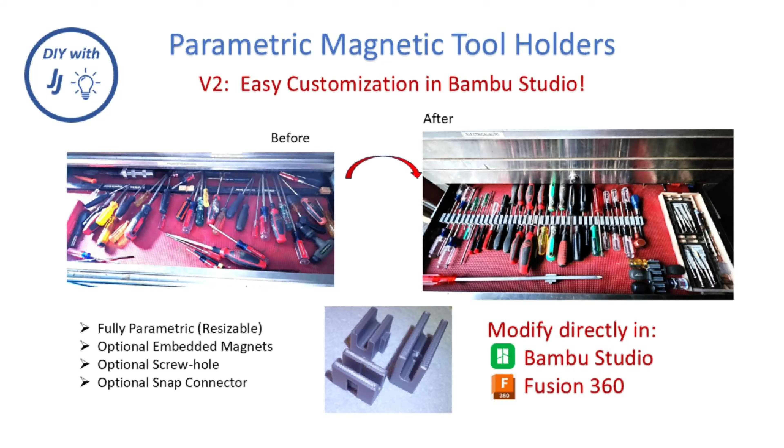One of the first 3D designs I posted online a couple of years ago is also the most popular design I've posted so far. It's my tool holders with embedded magnets. It was also one of the first YouTube videos I posted. There were three different sizes in that post, and I've had a few requests for more sizes, and indeed I've found such a need myself.

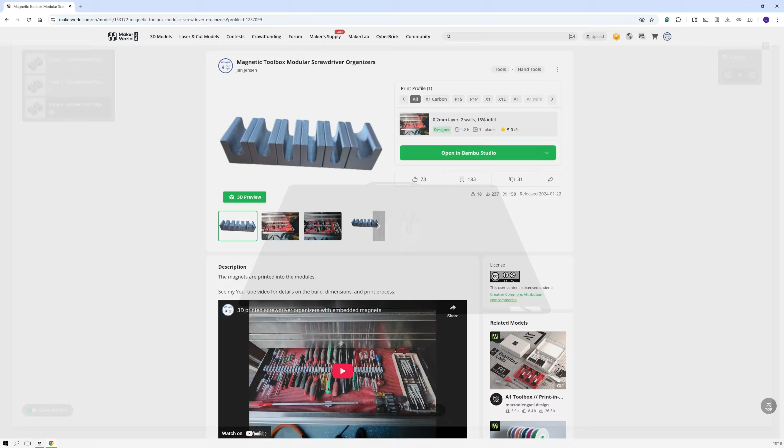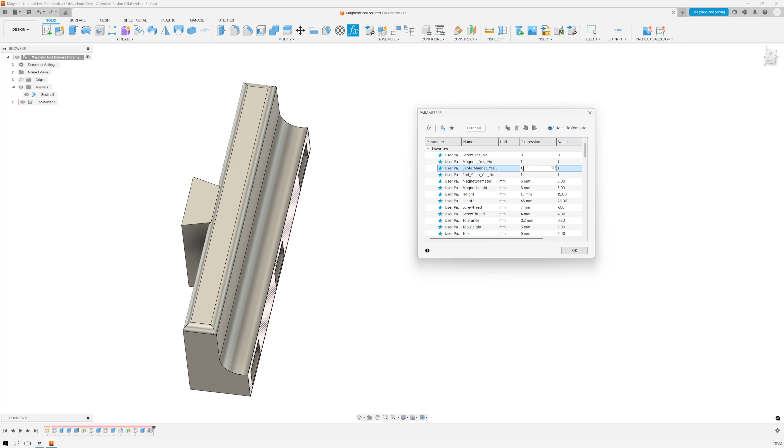Rather than posting more variants and sizes, I set out to generate a parametric design that enables you and I to generate almost any size and configuration desired. I wanted optional embedded magnets and optional screw holes. Here you can see how fast and easy it is to reconfigure the tool in Fusion. You can also make these changes directly in Bambu Studio. Keep watching the video and I'll show you the details.

These organizers have really worked out well for me, but in the 2 years I've used them, I learned that there were some changes that could make them even better. That's what this video is about. In it, I'll show you the following.

First, I will show you a couple of not so obvious reasons to be able to make many different sizes and to modify the design itself. Next, I will show you why I chose Fusion for this type of design. Then I will go over every user parameter in Fusion and how you could handle them very efficiently. As I mentioned, you can change the parameters directly in Bambu Studio, and in the next segment, I will show you how to do that.

Following that, I will show you how to print the magnets directly into the tool. No glue is necessary. In the final segment, I will show you how to handle logical parameters in Fusion, just in case you want to make similar flexible designs yourself.

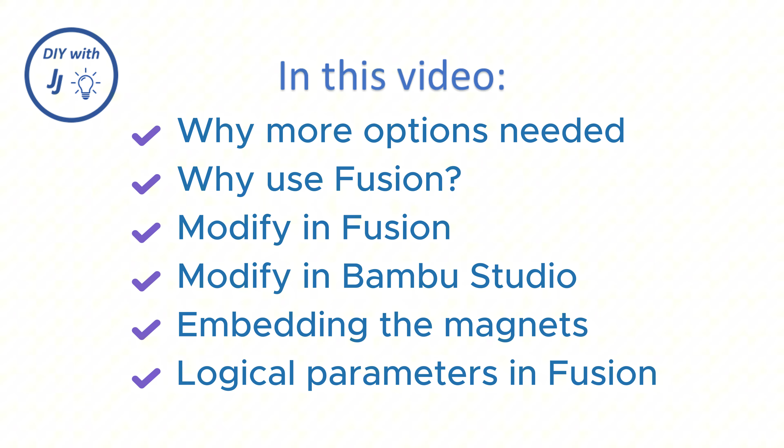So, other than the obvious reasons for different sizes of the tool holders, what was it that I learned from using the organizers in my toolbox that necessitated some other options?

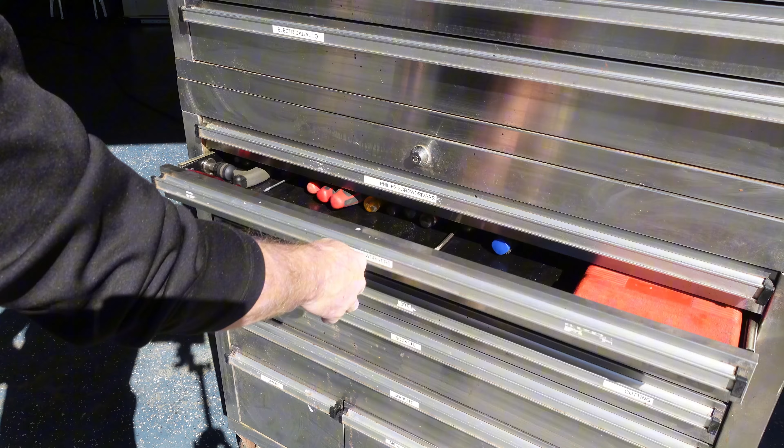The rare earth magnets I used in the toolbox holders are very strong, but unless your drawer bottom is made of a magnetically responsive material, they won't work. Obviously, wood or plastic would not work, but even some steels like stainless steels or very thin steel bottoms also tend to have very low or no holding power for the magnets.

My toolbox is made of stainless steel, but the bottoms are carbon steel. The problem is they're very thin. Therefore, when slamming the drawer, the organizer row gets misaligned. Additionally, for items like stubby screwdrivers with a lot of mass and little steel, they tend to slip out of the tool holder, so a tighter fit is necessary.

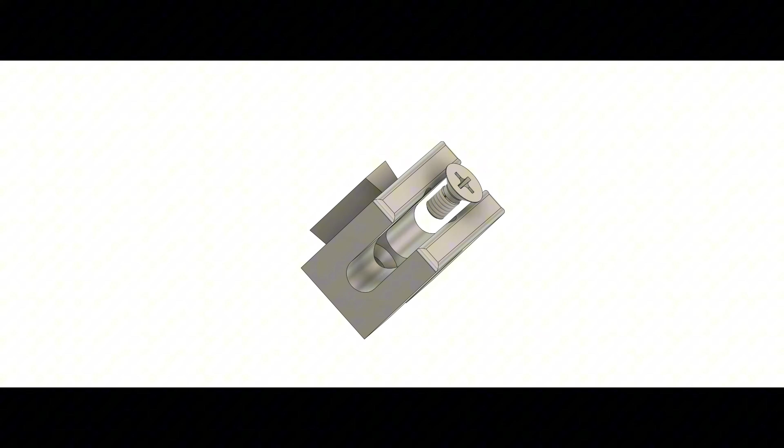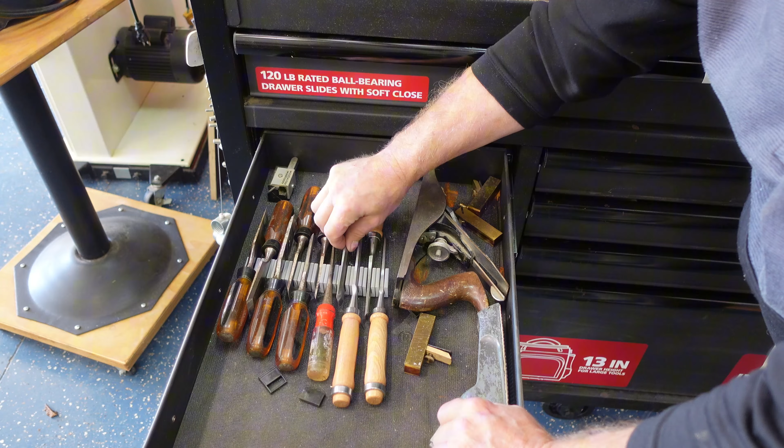The simple solution to this movement is 3 or 4 screws in the tool holder row. And if you print each item snug enough and specific to each tool, you might even skip the magnets altogether. I use the tool organizers for other items such as chisels, where I would like a taller tool holder. Therefore, my new design allows size changes in all directions.

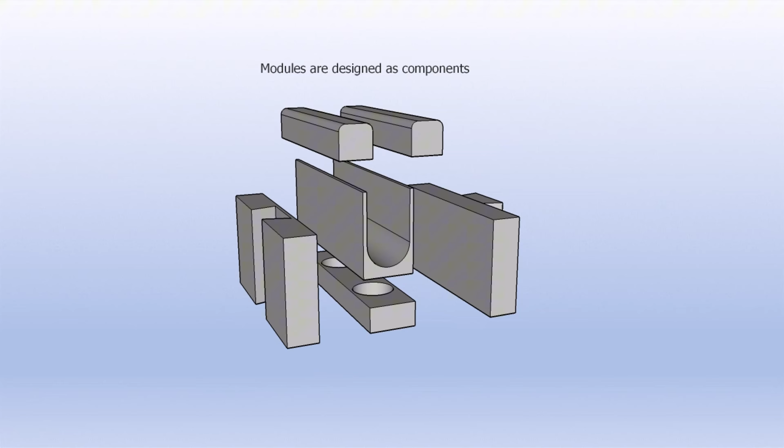That brings me to the reason why I switched to Fusion for my designs. My original tool holder design was made in SketchUp. Not knowing better at the time, I was quite pleased that I could split the tool holders into smaller segments so I could make size changes without having to redraw everything.

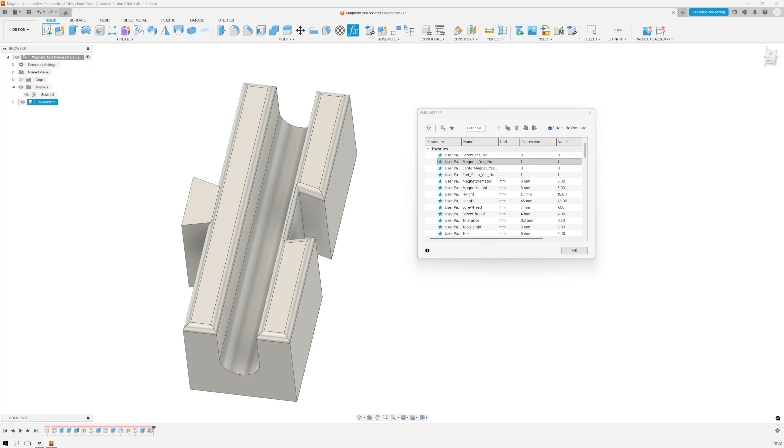But this is no match for parametric design. The ability to set measurements and options and be able to change those things with a click and a simple input is far superior to editing the basic drawing. Let's go over all those size and options parameters in Fusion and how to handle all those adjustments quickly, and explain each and every parameter that you can change.

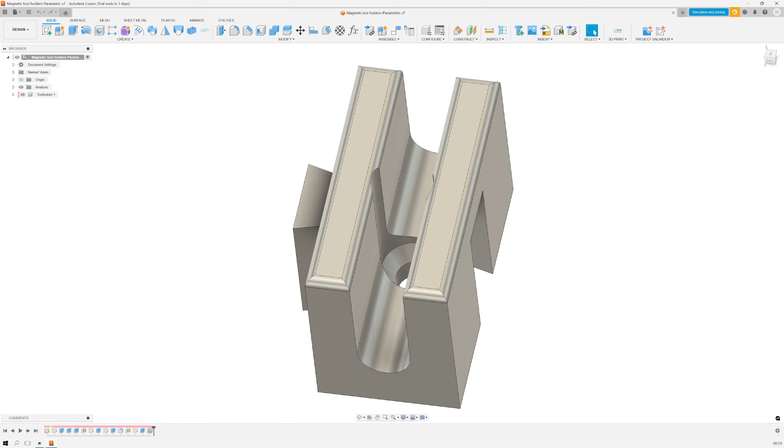Open the tool holder file and then close the Fusion browser. Now use your mouse scroll wheel to reduce the size of the tool holder, and press and hold the scroll wheel and move the image to the side to give us room.

Now open the parameter window and resize the columns and the size of the window. We need to be able to see all the starred favorite parameters and all the columns, especially the expression and the comment column.

Once you have sized the window and the columns, click on the comment header to sort by this column. Unfortunately, Fusion does not allow you to set an automatic sort, so you will need to do this manually every time you open this. I tried to make the comment simple and easy to understand, and once sorted, you'll see all the option switches on top and all the sizing parameters below that.

As you can see here, Fusion does keep your sizing in the session, but again, the sort order is not preserved.

The first option switch in the list is the screw hole. If it's set to 1, you'll get the hole, and if it's set to 0, it disappears. Obviously, we do not want the screw hole if we're planning a center magnet. So if that switch is set to 1, the screw hole will also disappear.

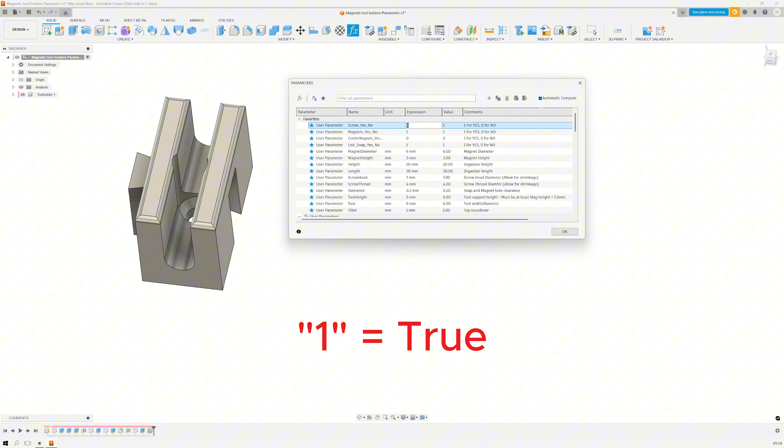This is controlled by Boolean logic, which is widely used in computer programming, and it can be very sophisticated. It isn't in Fusion. In Boolean logic, 1 equals true, whereas 0 equals false. In Fusion, it's merely 0 false, and any other value is true. So you can set any other value than 0 and it will hold true.

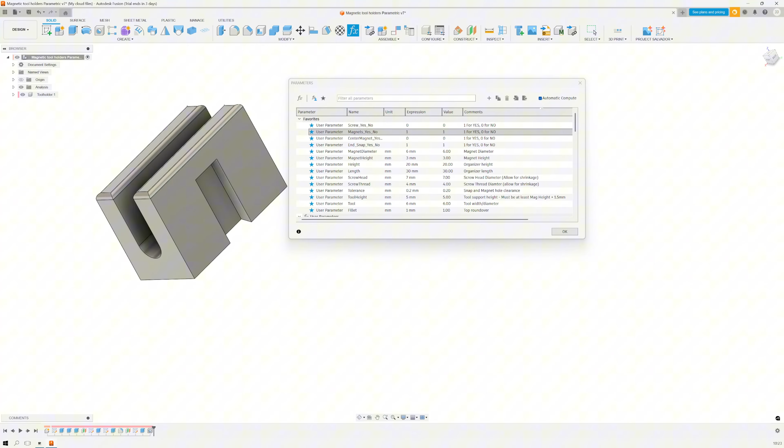For the next 2 switches, I will turn off the screw hole and I will use the section view to show you the effects, which can be observed absent any further comments from me. The last switch is to remove the male snap piece in case the tool holder is placed at the end of the row.

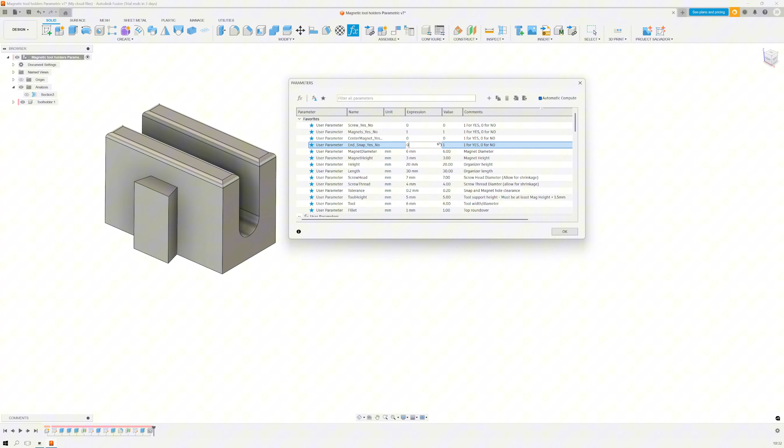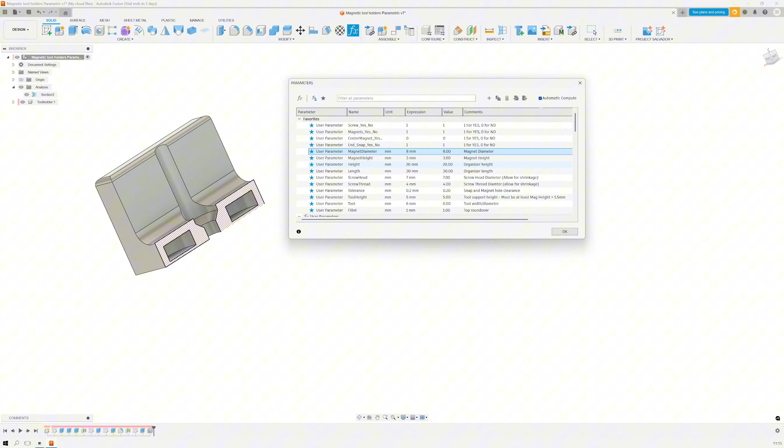The rest of the parameters are for sizing. First, the magnets. Input the exact measurements of your magnets. The tolerance parameter provides enough clearance to insert the magnets. The tolerance numbers pertain only to the magnets and to the snap connectors. For all other dimensions, if you experience plastic shrinkage, you will have to adjust your inputs.

Now just take a look at the changes in the design as I make parameter inputs. The comment column should also provide enough information for you as you prepare your tool holders.

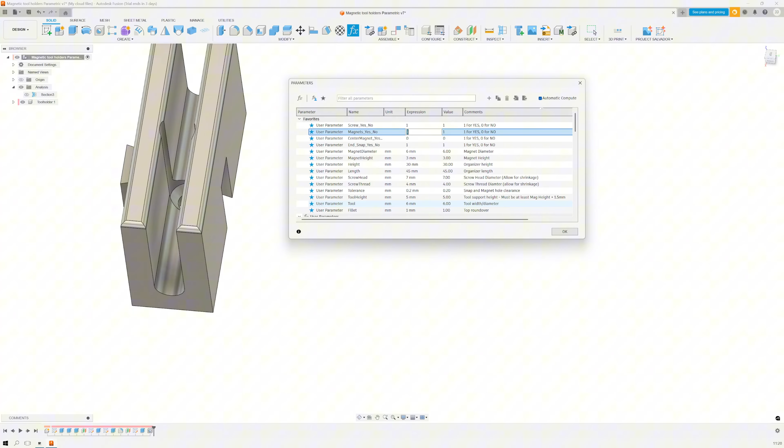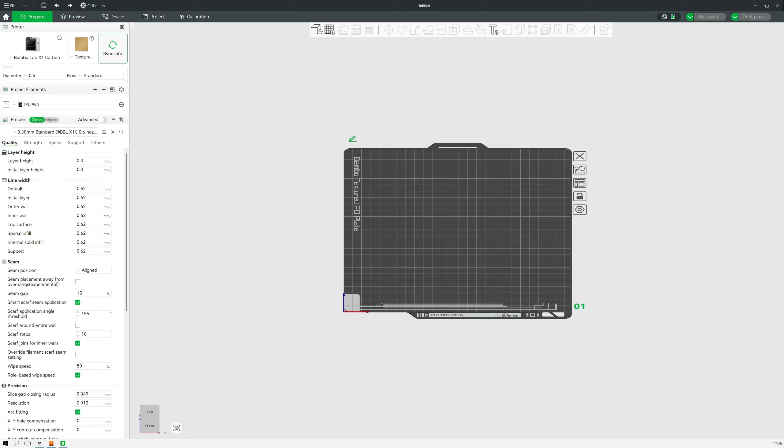Now let's look at how you apply these parameters with Bambu Studio. To be clear, and before you make a bunch of comments, I use the term Bambu Studio loosely. It's actually in Bambu's MakerWorld webpage you make the parameter modifications. You can access MakerWorld from inside Bambu Studio by going to the home page and clicking on the MakerWorld icon. From here you can search and open the designs as you would on the web page.

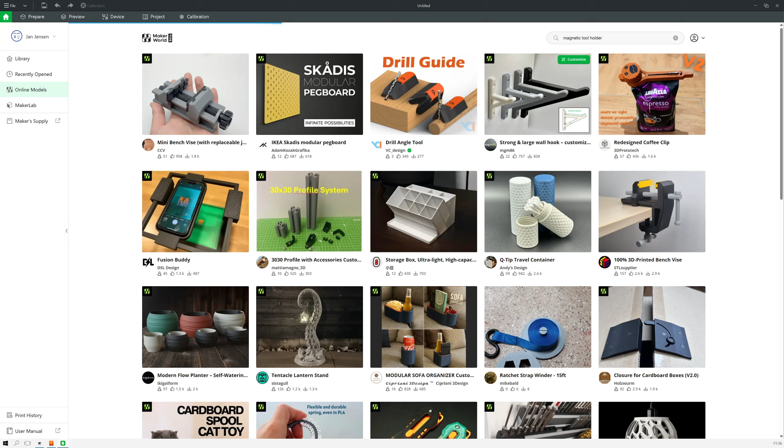I will use the web page here. What you do is click on the green Customize button. That will bring up this page where you see all the stored favorite parameters from my Fusion file. Since I just showed you what each parameter does, I'm not going to repeat that here. I will merely set a few of them here and I will generate the resulting tool holder for downloading.

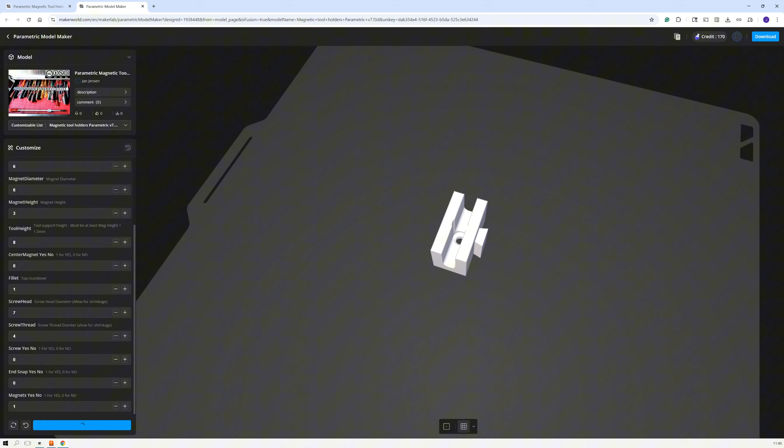Be advised that this is being played back at double speed. The generator takes a little time. Once the item is generated, click download and just follow the prompts. You now have a new customized tool holder ready to print.

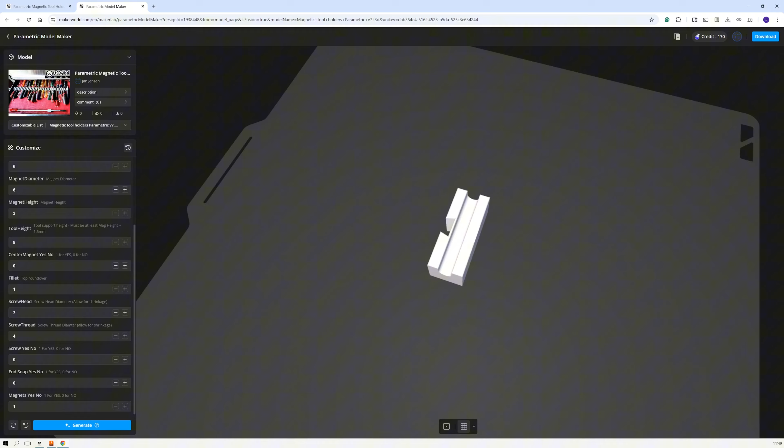Now let's take a look at how you insert the magnets in your print. I had that in the original video, so I'm just going to repeat that right here.

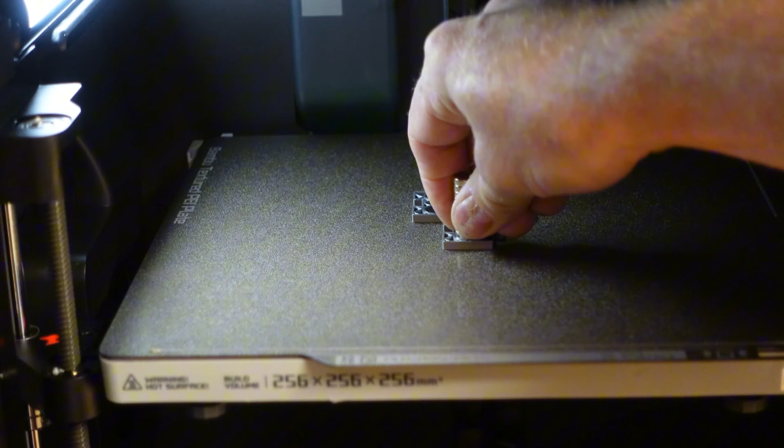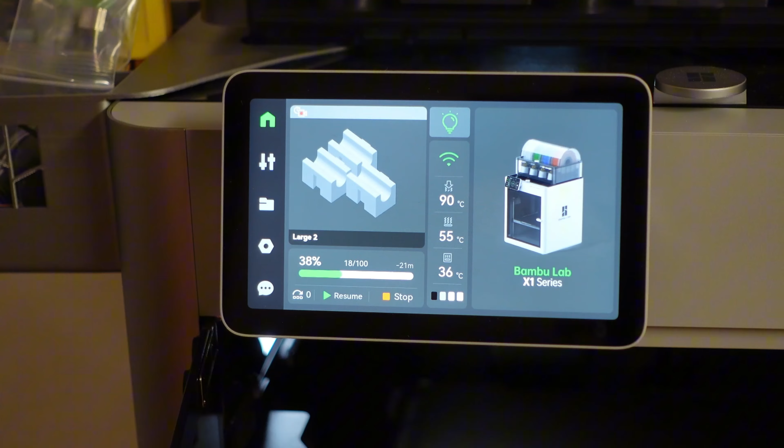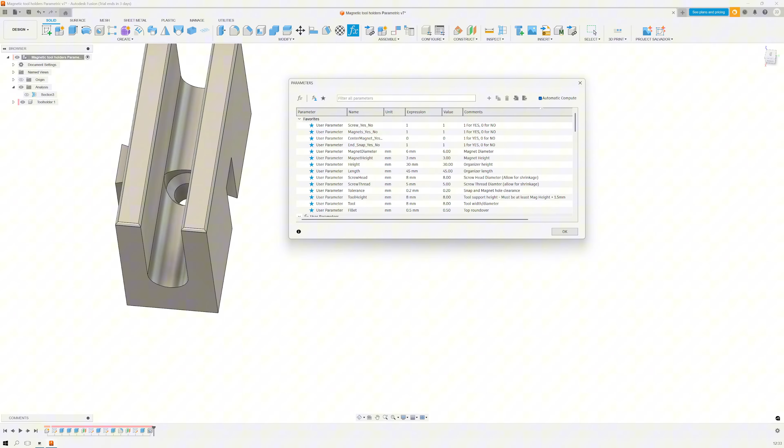The last part of this video is for Fusion users. I'm going to go on the assumption that you already know the basics of Fusion, so I'm strictly covering how to use the option switches that utilize Boolean logic. The logic statement is a simple if-then statement. It is structured in this manner. The word if, beginning parenthesis, your formula, semicolon, the result if true, semicolon, the result if false, and the end of parentheses. It's that simple.

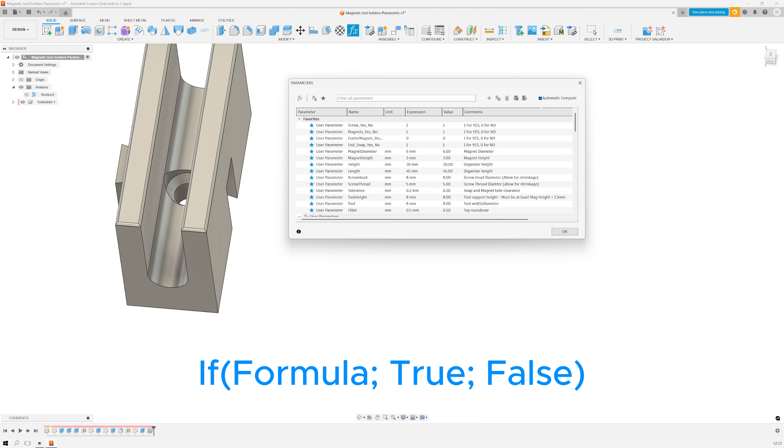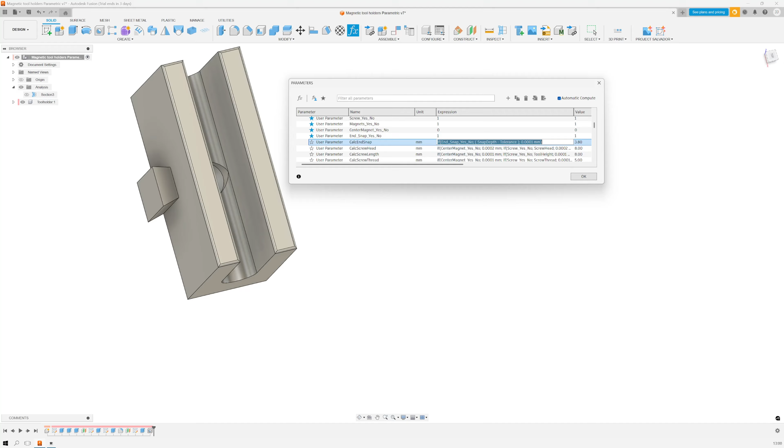So how do you apply them in Fusion? You saw my switches, which are simple, no-unit parameters that result in true or false as 1 or 0. I will start with the switch I use for the snap connector. I made an expression called CalcEndSnap. Let's look at the formula and where it's applied. It is applied in the very first sketch. Let's move the tool holder a little bit so we can see the sketch a little easier.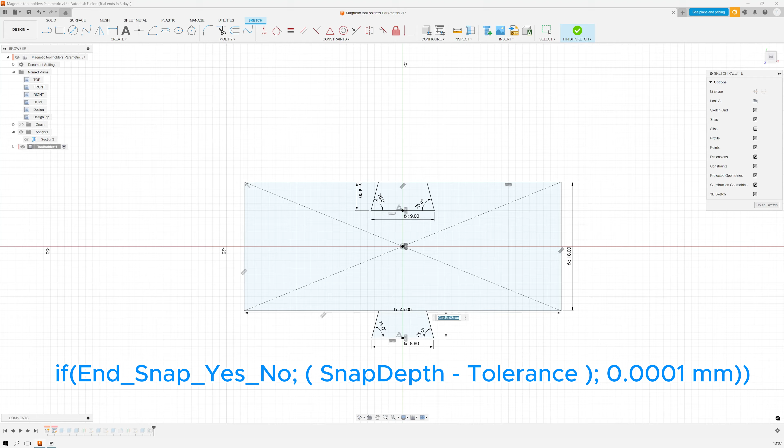Let's click on Edit the Sketch, and right here where I sketched the male snap part, I use the expression CalcEndSnap. If that statement is true, the snap is sized by the parameter snap depth minus the tolerance to make it fit. If it's false, it's set to 1/10,000th of a millimeter. Why? Well, because if I set it to 0, the Fusion formula would actually fail and the drawing won't work. But since your 3D printer will not be able to detect a 10,000th of a millimeter, this does work.

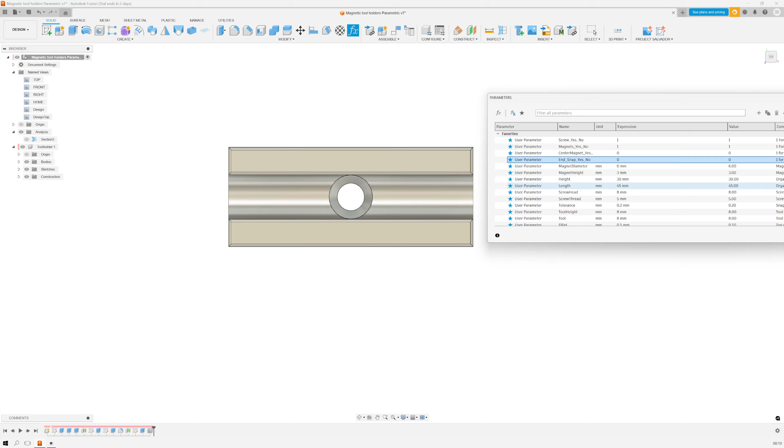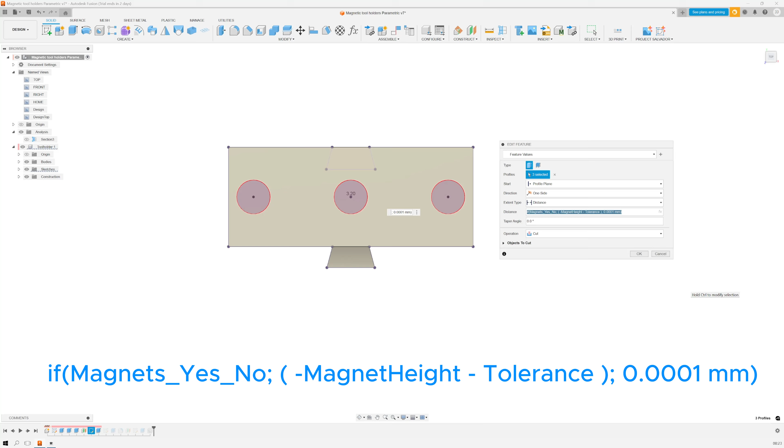I used a similar trick for the magnets, but instead of handling this in the drawing, I just went to the extrusion and put the formula in there. And here's the formula. As you can see, it's pretty much the same format as the snap connector. The center magnet has its own switch, and since the magnet holes are copies of each other, I was actually able to use 0 for the center magnet.

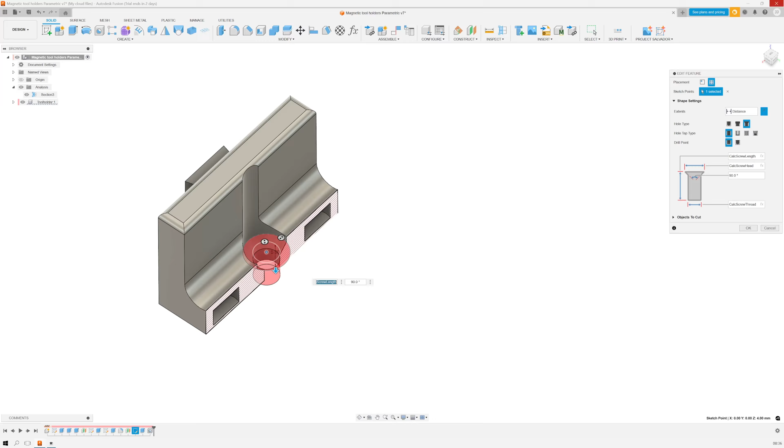The last switch that controlled the screw hole had me stumped. I kept getting errors. This one involved nested if-then statements, which is not complex, since I needed it off when the switch is off and additionally when the center mag is on. This was not the stumbling block, however.

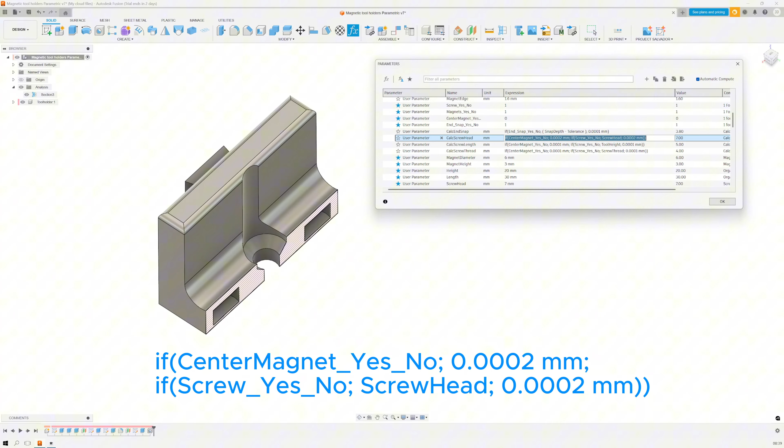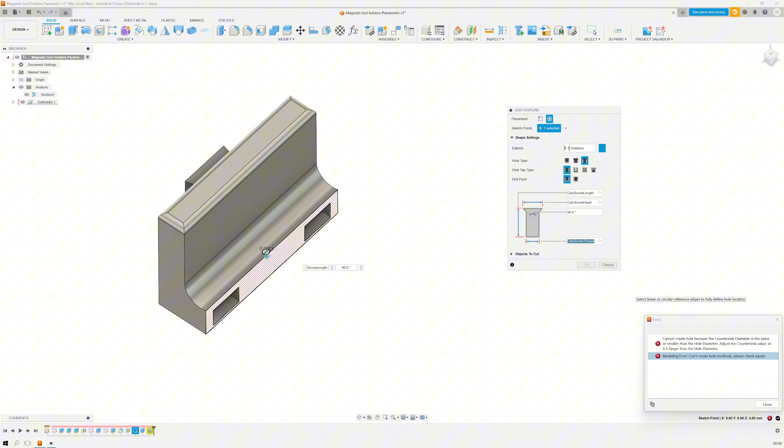Notice how I used two 10,000ths of a millimeter for the result when the switch is off and not one 10,000th. Look what happens in Fusion if I set it to the lower value and I turn the switch off. It took me a while to figure this out, but then I realized when making a screw hole feature, Fusion expects the head of the screw to be wider than the thread, thus the error.

I have used logic in several Fusion designs. Just look at my phone cup holders. The charging ports appear automatically when the phone design is sideways. I hope this video has inspired you to improve your own designs and that you'll share those designs with the rest of us.